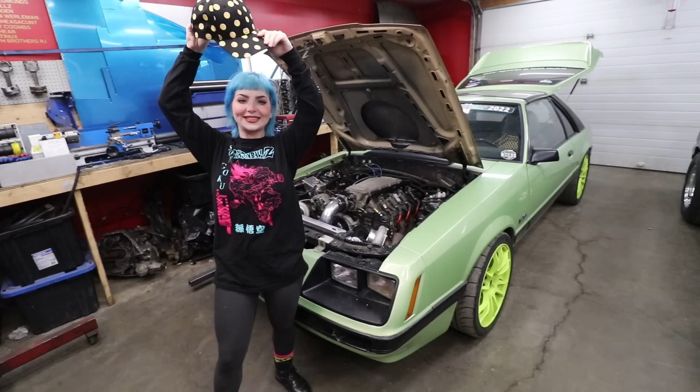It's been a while since you've seen it. Me or the car? The car. Well, that too. It's back.

It needs a few upgrades before this year's race season. Speaking of that, May 20th is the first event, which is Tuner Bash, I believe, in like 3 or 4 weeks. I'm not very good at that. Tuner Bash is the first one? Yeah. Oh, okay, nice.

So last year we had an issue with this car where we were trying to get on the two-step at 3,700 RPM. It ended up taking like 47 years. Transmission didn't like it, transmission got hot. Good thing we got the giant cooler in the front, but this year we need to solve that problem so we can increase where our two-step is so we can leave on more power.

How are we doing that? This. Dang. Dang. Circle D Specialties torque converter.

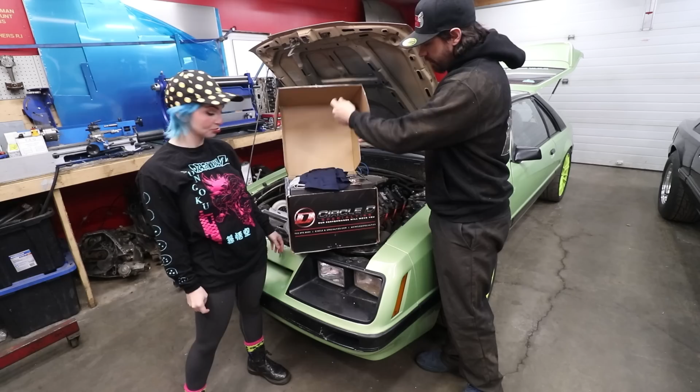Oh, swag pack. Look at that. Thanks for the shirt. Is this one for me? Yes, it is. Are they the same size? No, definitely not. That big D.

Big D energy. They even gave us the hardware with it. That's really nice. They wouldn't give you hardware with it otherwise? Like this? I don't know. I'm not even sure I've bought a brand new torque converter before.

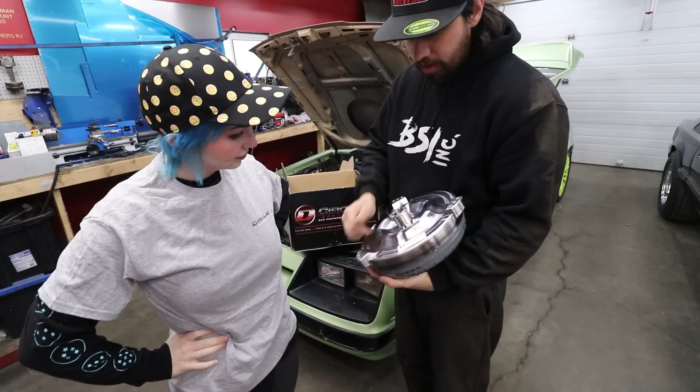Oh, you've always bought a second-hand one? Yeah. Well then, oh, that's the unit right there. This is like the first time I've seen it, but this looks like a billet backing plate on this one. And they've got holes, so depending on where you put it in the flywheel, different distances. That's really nice. Is that supposed to be a thing?

I don't know. Yeah, basically you call them up, you tell them which car you have, which power plant, how much power it makes, the camshaft in it, the rear gear, how fast you want to go, what does it do. They put all that into whatever wizardry they have, and then they build you the perfect torque converter. 9 chances out of 10, this thing's gonna work perfect. I hope so. I think I paid a lot of money for it too, so let's hope so.

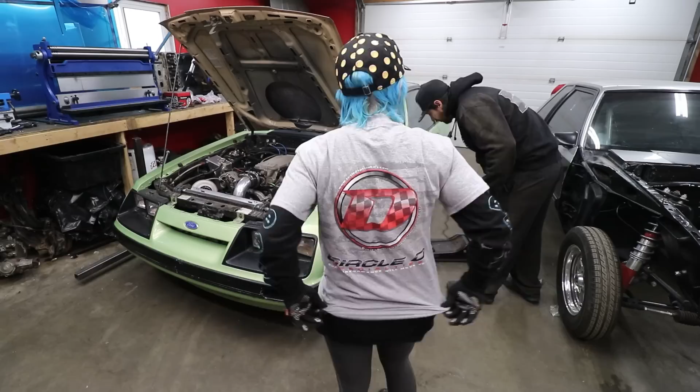First things first, we're gonna get this jacked up. There's rubber. Look at all that rubber. It's not actually that much probably, but.

I'm so excited for this race season. I was gonna say next race season, but I'm, what? You were so way tilted. Listen, I'm just tilty, okay? I'm tilty in the brain. That's how I see things. So you're excited for this race season? I am excited for this race.

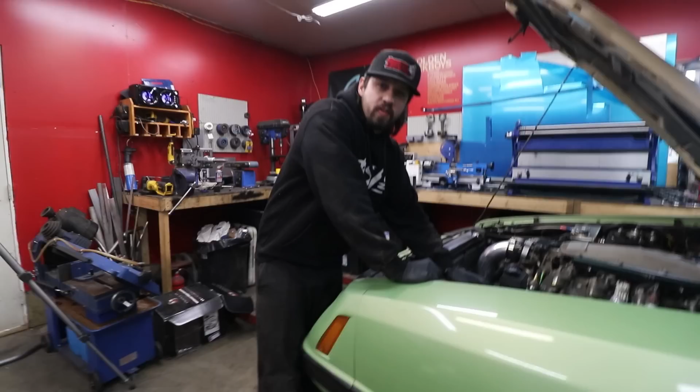Sick Summer is actually coming up in like 1 month. We're taking which cars? Your auto Mustang? Yeah, my SN95 and then this one. So we're gonna make sure everything's good. Like I kind of want to redo the exhaust on this thing and I kind of don't, but I want to redo some of the cooling to make it better, the fans to make it better. So there's definitely a dozen and one little things that I want to do to make this thing better.

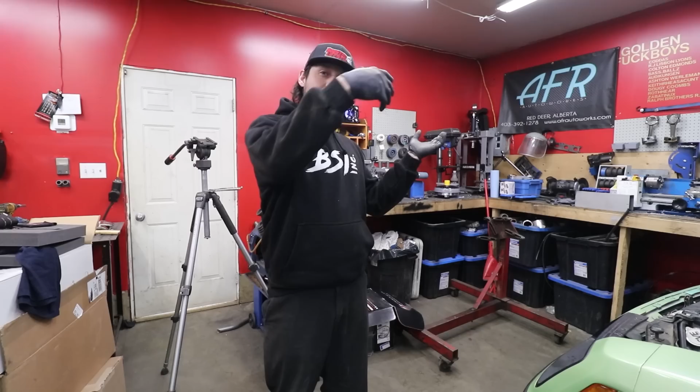And we're gonna start with the torque converter. Now that we've got it in the air, we'll start disconnecting the drive shaft, the exhaust, the transmission cooler lines, all the bolts on the transmission, and then finally get it out. So we can slide the new converter in, bolt it back up. Yay, sounds like fun. It should only take like 20 minutes.

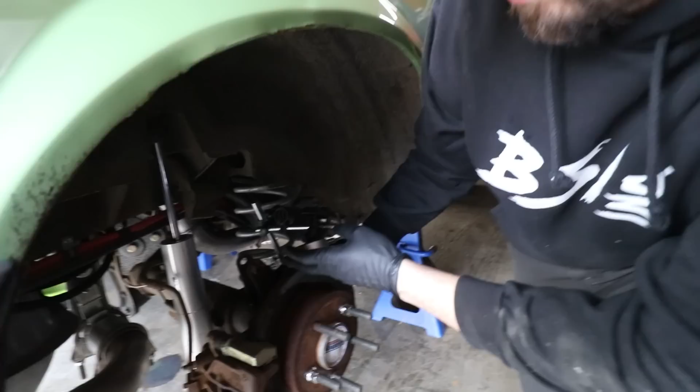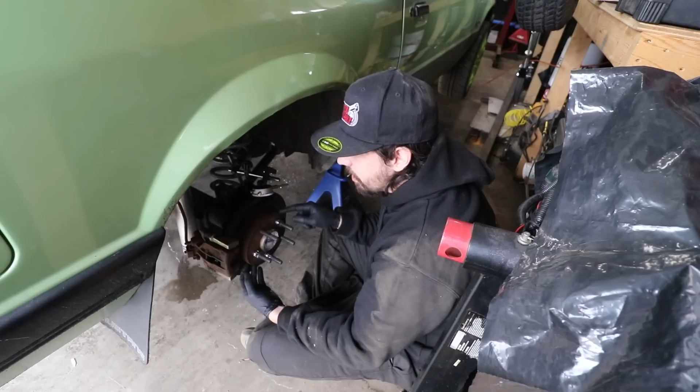There's a wheel off. Kyle's checking something with the dial indicator. Tell me what's going on there, bubby. So what I think I want to do, because we have a vibration in this car, I want to see if the runout on this axle is bent at the end, because this is the rear end that did hit the wall in my New Edge Mustang once upon a time ago, a few years ago. And I never did check the runout, and I think it might be our problem.

I'm just a little surprised that you didn't check it before putting it in my car, to be honest. You knew that when you hit the wall, it was enough to crack the body of your engine. But I hit the front, I didn't think I hit the rear. And the only thing that makes me suspect that I hit the rear is Colby, actually, like the wheel that I was borrowing that was on the SN, or the New Edge. Oh, I see what you mean. Like something else that was on the rear end was also defective that was checked after the fact. Yes.

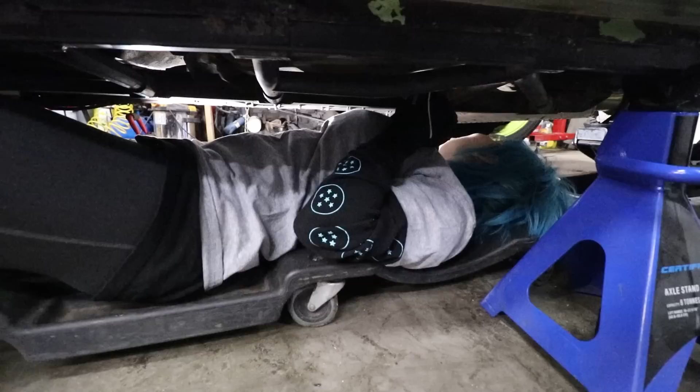Sometimes you've got to say please. Belch it out, lady. Sometimes you've got to say, hey, I'm gonna screw you softly. I'm gonna screw you gently.

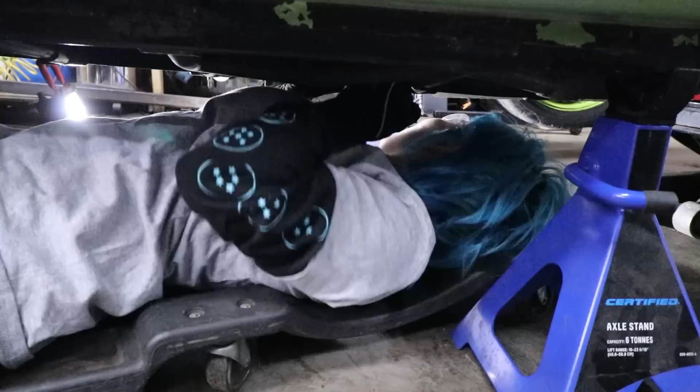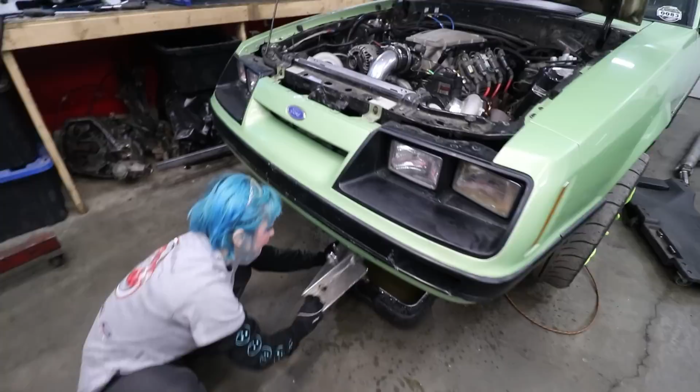Gina's pulling the drive shaft out right now. So Gina's pulling stuff from the cooling system. We're gonna redo that while we wait for another drive shaft to come in. So we're just gonna redo the cooling system. I mainly wanna get this hose right here that's on the return side to go into the side of the radiator instead of the front of it, so that we can put air filters back on the turbos, because overall it's gonna help make your engine survive longer.

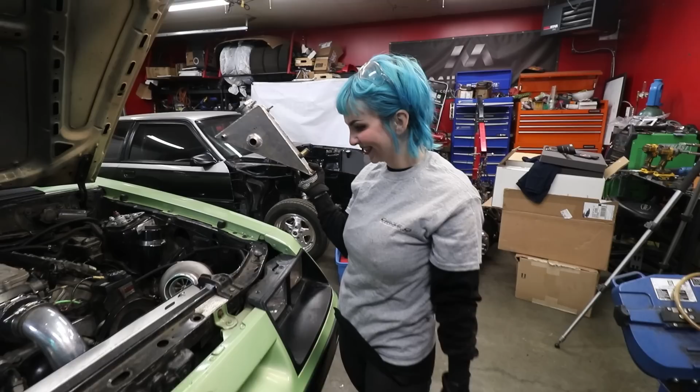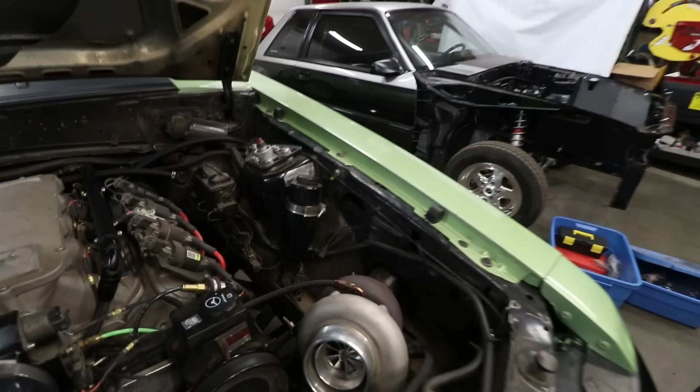Yay. So we're gonna get rid of that tank. That tank was never permanently mounted. It was just like a test tank. We're getting rid of it, or you're just... No, I'm gonna rebuild another nicer tank on the other side. Okay. So we're gonna replace that tank with something over here behind that turbo. Essentially, yeah. Well, we're gonna get rid of that one on the... This? You're getting rid of that one too?

Yep. Remember how that one would spurt, psst. Yeah, like 10 feet in the air out of that little top hole. When it was overheating, boiling over, yeah. I remember. You'd be like, watch out, watch your face. Oh my God.

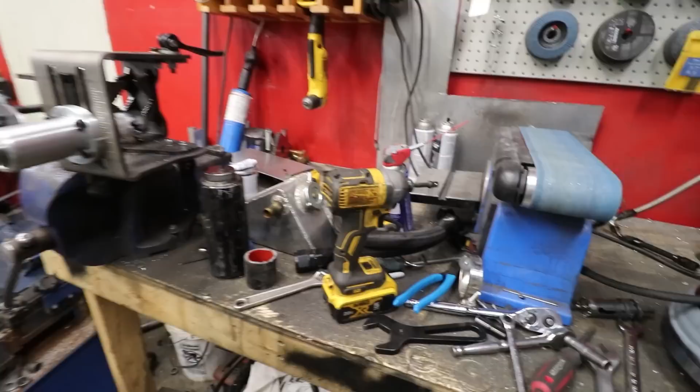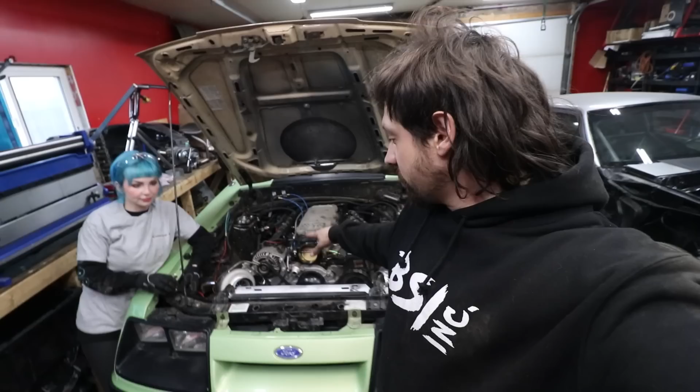Gina's got everything stripped out of this thing. It's not me. Little handy woman here. She's got all the coolant stuff ripped out of this thing. She's taking the wiring out for the fans now, because we're gonna redo that as well. We had to stage them in. So these are contour fans, and last year we had them so they both kicked on at the exact same time. And when you do that, it actually pulls the motor down. And if you're at an idle, it'll actually kill the car, make it turn off.

So we're gonna redo that so they're staged fans now, and then redo the cooling system at the same time, tuck away some wires, just make it look a lot better, because last year we really thrashed to get this thing done and Tokyo's car done, that some stuff was done half-assed. And usually you're like, oh, I'm just gonna leave it half-assed for a while, and then most times it just stays that way, but we want it better.

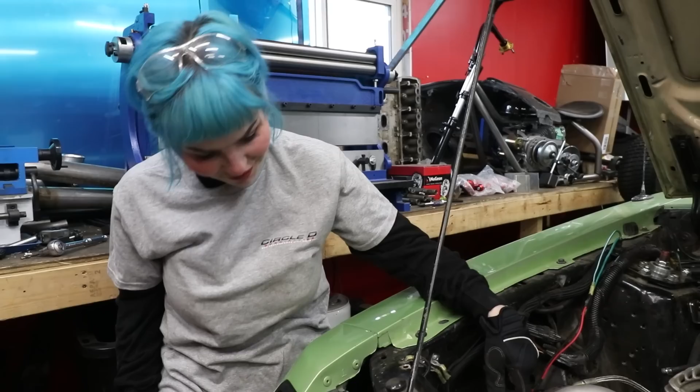Well, I'm about to lose a nut. You're about to nut? I'm about to lose a nut. I'm about to lose a nut too. You keep bending over like that. It's gone. It's okay. I've lost more than one like that. I think it went in between. I tried so hard to save it. Where did that nut go? I don't know. It's gone. It went inside, so I feel like they call that a cream pie. You cream pied it. Tell me about it.

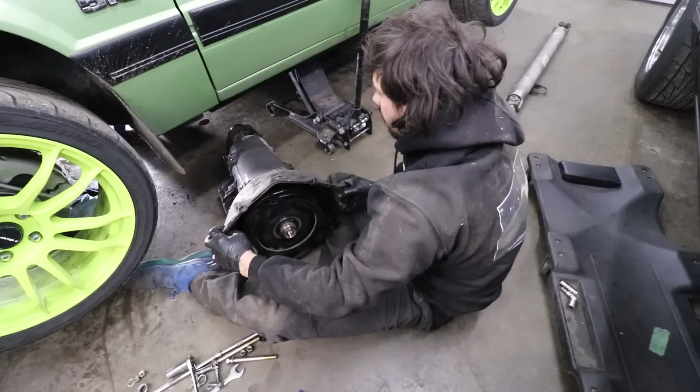Here she blows. There it is. Wow, look at it. Look at all them chickens. Look at all those chickens. This is the part that we need to replace right here.

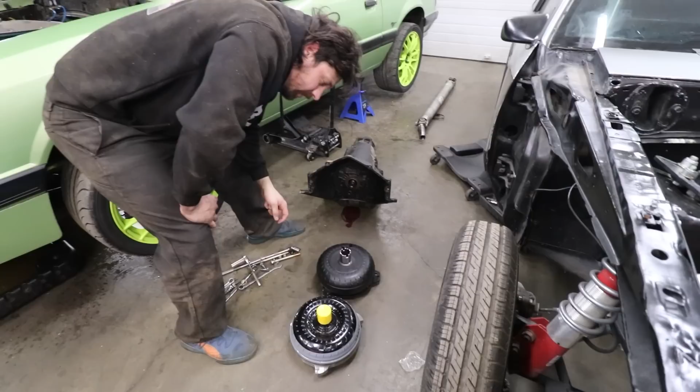So yeah, this is your Circle D converter, and this was just a Summit shelf converter for a nitrous application that, you know, some people said it might work. So we put it in there, and it didn't work that well for our combo. It's just a little bit too tight. This one's gonna go in. This one is spec'd for the car. Should be 100 times better.

I hope so. What were some things we were hoping for improvement, like putting it into first and how it slams into motion, basically? Yeah, so basically it was so tight that when you put it in first gear, it would give you slam, whiplash. And then the shift drop, when you shift at 7,000 RPM, I don't remember what it drops to, but it drops like 2,000 RPM. You want to tighten that up so it's a little bit looser, so the drop's like 1,000 RPM. Okay. Yeah, we're gonna pull this tail housing off as well to see if that's worn out or anything.

Where it connects to the drive shaft? Yeah, and then we'll clean it up, put that converter in it, get the stuff back in there. But I think we've decided that we're going to leave the drive shaft out of it, get another drive shaft made for it. And that's why we pulled all the cooling components out of it. So while we're waiting for that drive shaft, we can do all the cooling stuff in it.

We're also gonna put a set of 308 gears in it instead of 373s, which ultimately will make it slower in the quarter mile, but will give us a lot better highway cruising, which this car needs because it's already too fast for itself in the quarter mile. And then we have an anti-roll bar to go in this thing as well, which we gotta put that on. And that's gonna stop the car.

So if you watch the videos from last year, the car would do this going down the track. Yeah. What we're trying to do is eliminate that, and it'll give us a better launch and keep this car stable down the track. What does it do instead? Instead of like twisting a little bit, will it just like squat more? It'll either squat or it'll lift up on both sides.

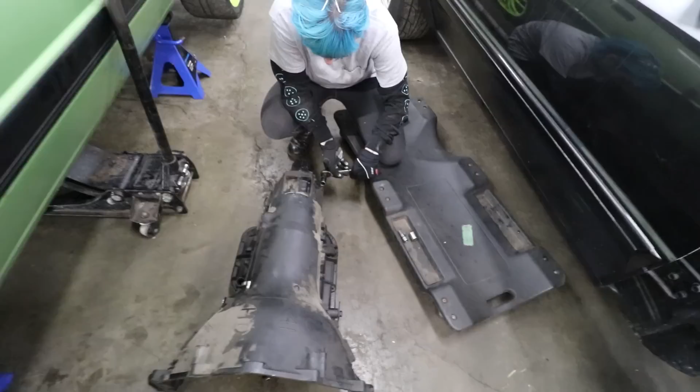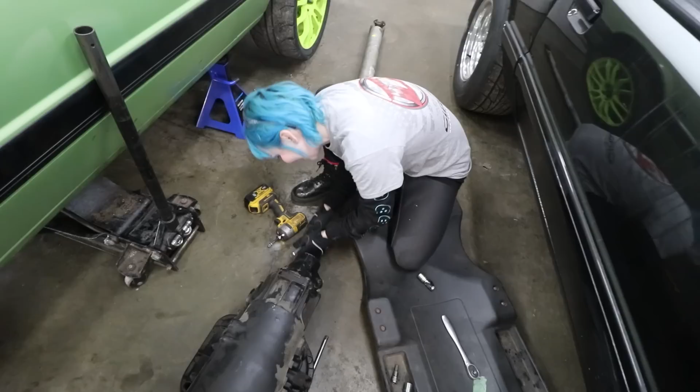Now that all the hard work is done and it's out of the car, I'll let you do some stuff now. Okay. Can I have a socket? Did you get the socket jammed in there? Yeah. I'll get it, but...

If you had to get one car right now, what would it be? Like, no restrictions, no nothing? No restrictions, no nothing. I'd get my Porsche. I'd get my Porsche GT3. That GT3 we've seen in the jelly bean color? Yeah. The jelly bean color. This one right here? What? This one right here? Oh, you're probably gonna put a clip in? Yeah. That one I really liked. It's probably not my ideal color, like if that was in yellow. So yellow. Like a smiley face yellow GT3? Oh my god. Yes, that's what I would get.

I'll take a yellow R8 as well. A yellow R8? Yeah, yellow or like a blue or something. It's got to be jelly bean color. Jelly bean color. Yeah. You don't pay like $250,000 for a car and then have it be like gray or black. People do though, and I know. I get it. Like people don't want to be flashy, but you literally just spent all that money, and it looks way better in a bright color anyways. Like a little dinky car. That's what it reminds me of. Dinky cars. Dinkies. That's what we call Hot Wheels, by the way, in Canada. Wait, other people don't call them dinkies? They probably don't call them dinkies. Really? It's weird that you don't call them dinkies.

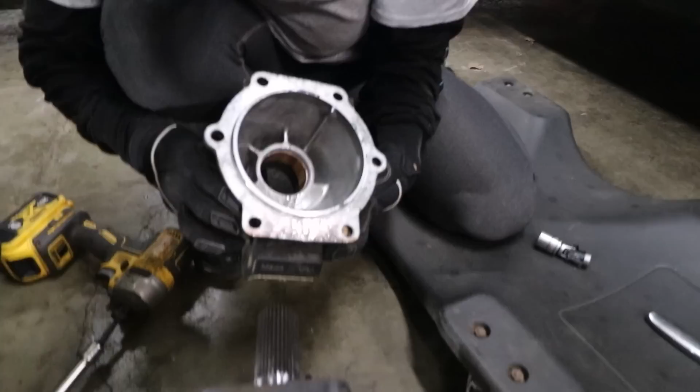So there's a bronze bushing in there that's probably forked if it was wobbly in there, definitely. Yeah. And then this, I don't know if this is supposed to wobble too, but I think it is. I think that the drive shaft and that bearing is what centers that piece. This piece. Oh? Okay.

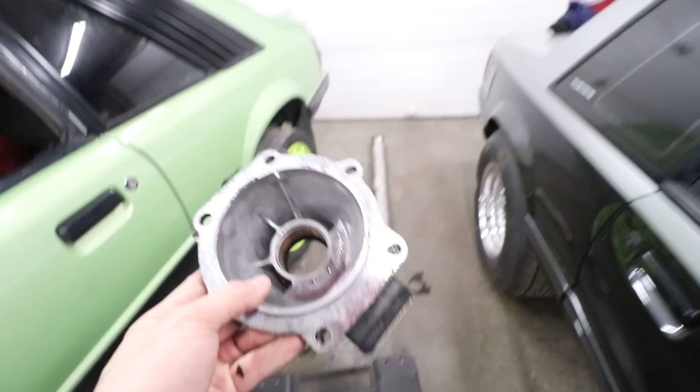All right, it's the next day. Gina's actually inside getting her stuff ready for the Calgary Comic-Con, which we're going to this weekend because she's huge into cosplay and everything. I'm going to toss this torque converter in here and get a transmission up in place just so it's not taking up spot on the floor. James said we can go ahead and throw the transmission in. We're just going to have to replace this bearing here because it did wobble a lot.

That yoke was actually the right size on the outside dimensions, but we ordered a new one that's probably this short compared to how long this one was. And then on the rear, we actually ordered the flange style yoke. So instead of a bolt-on one, it's just one that pops into the U-joints. It looks like this. I got it from Strange. So when we do the rear gears, I'm gonna put that in as well.

And then we'll have the center to center length and we'll get a custom drive shaft made for this thing. I'm also going to redesign the exhaust in this. I ordered a dual 3-inch to 3.5-inch merge. And I'll tell you why I'm gonna redo the exhaust system. We're gonna use this box for convenience right here.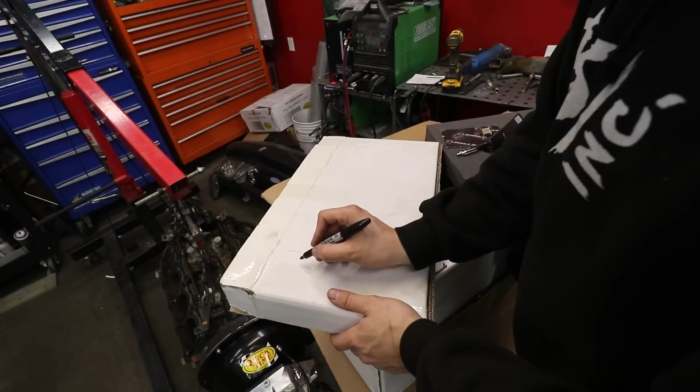So the rear axle is somewhere in this area right here on the car. And obviously the dual exhaust goes around, up and over the axle on both sides. The problem being on the passenger side, our surge tank is actually mounted back here somewhere. And the distance between this side of the exhaust and the surge tank in some spots is like quarter, maybe half an inch. And then on top of that, all our fuel lines run down this side of the chassis of the car and our power wires.

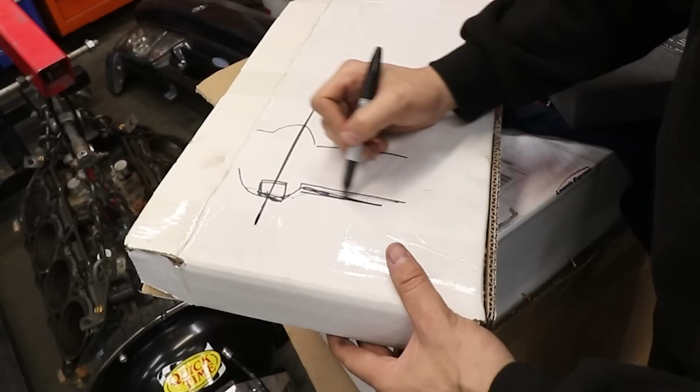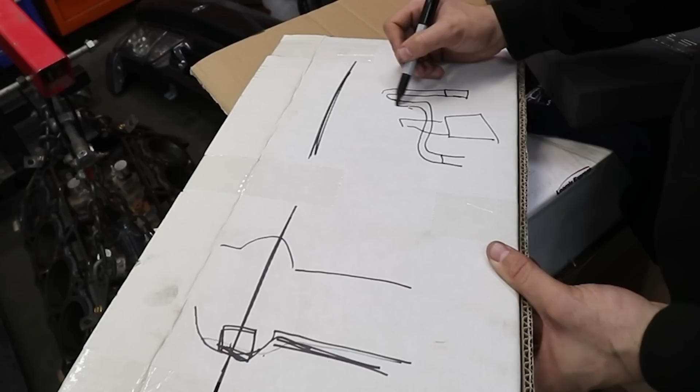So to get away from the heat, what I'd like to do is take our rear axle and I'd like to run where our 3-inch exhaust exits right here up near the front where the engine and transmission are. I'd like to take this side and run it down that side and take this one and run it down this side and then merge these two together. Put one big muffler here.

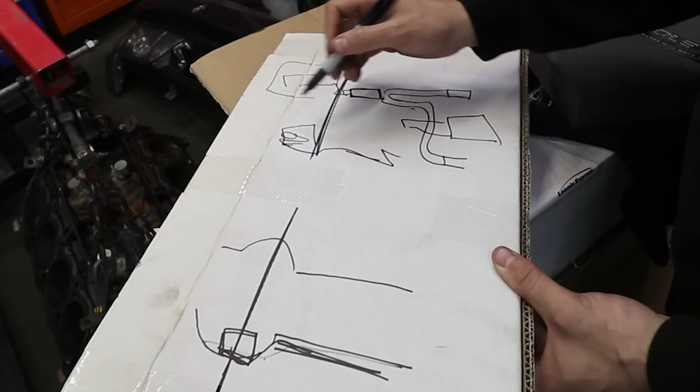So it'll be 3-inch here, 3-inch here, 3.5-inch out, up and over on this side of the car. And then it's just gonna be one tip on the outside, but it's gonna be on the driver's side. And that leaves all our fuel system over here unaffected by the heat. I don't see this car ever needing more than about 700 horsepower ever. So I think 3.5 inches is gonna do it. And like I said, I need to tuck that exhaust up, build it custom out of stainless because it's mild steel right now, and get it away from the heat.

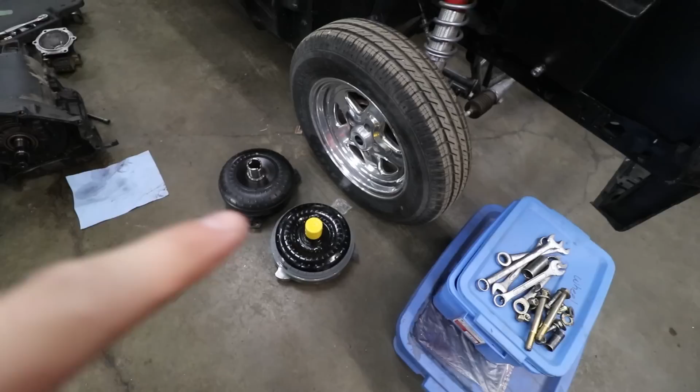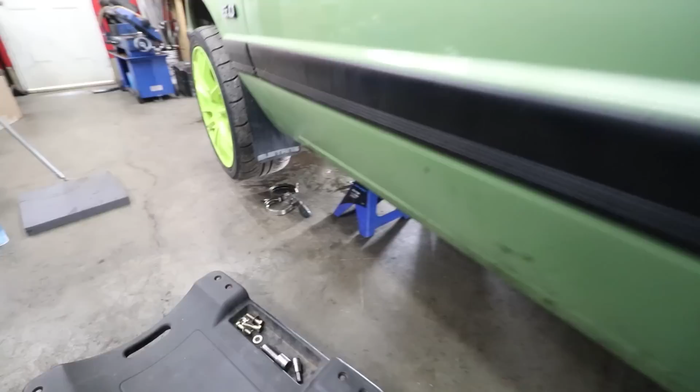Enough talking. Let's shove this converter in there. Before you shove the converter in, you're gonna wanna put a bit of oil in it. This one's already got oil in it, a lot actually. There's actually 2 splines that have to line up in the converter and this piece right here that hooks into the pump itself. So kind of just put it in there and start spinning and moving. And honestly, I think that was it. Usually it's much harder than that, oddly enough. Also gonna spray down this junk a little bit. Stupid thing, back up in place.

Now we're kind of waiting for parts there. What I'm gonna do is I'm gonna pull the 2 rear tires off, get all that exhaust junk out from back there, and then possibly start putting the sway bar in because it really needs the rear sway bar. I'm trying to get a good spot for this.

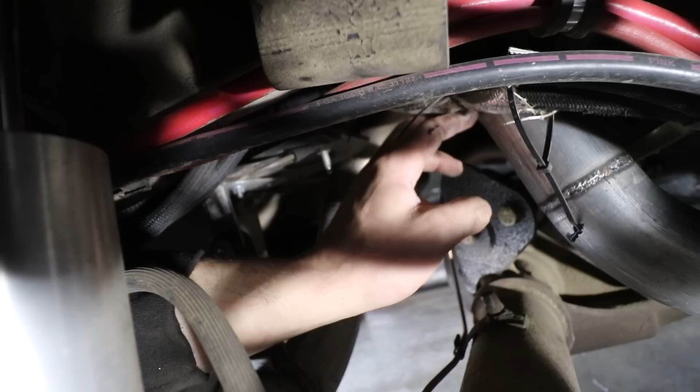You can see right there, that's our surge tank right here. This is the exhaust. When it's actually bolted up, it hangs like here, but that's how close it is to that. Here's all our wiring and stuff that runs along the frame rails. There's some fuel lines and stuff, so it'd be nice to get rid of this pipe and put it on the other side. So we're gonna get this out of there. It's kind of disappointing to destruct something you put some time into, but half-ass means twice as much work when you go full-ass the next time.

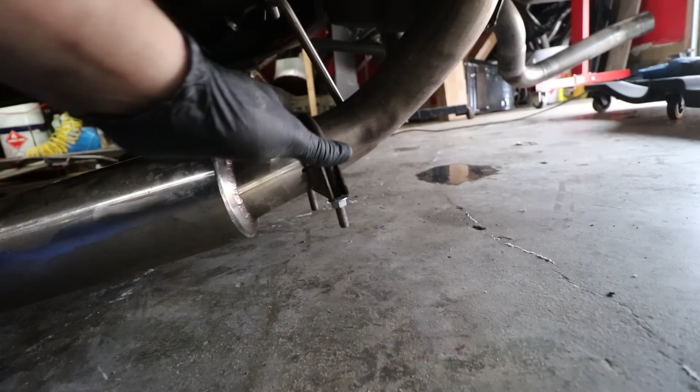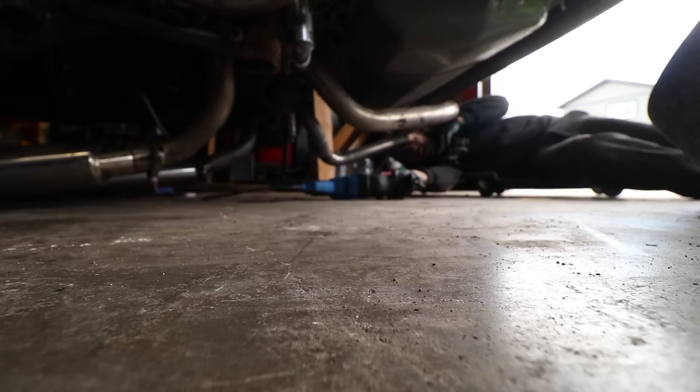This is another reason I hate exhaust kits. Anytime you put one of these style clamps on something, you basically just squish the 2 pipes together and then it still leaks and then it never comes apart. So now I've got to sawzall it apart and basically ruin this exhaust that I was never gonna use again anyways, but sure. With enough hammer beating, I'm sure I could get it off. We're not gonna play that game. I have no use for mild steel pipe, so. And just like that, junk.

I bet you Peg would love that though. He'd be like all over that.

Smile. Yeah, we're going to look at rental apartments. Investing. Trying to, anyways. There's nothing crazy about them, but they're spacious. They have obviously your own laundry unit, 2 bedrooms. Sorry I didn't leave you with any context there. We're looking at our first rental property. We've been looking at investing since we had more money coming in. It's just the first step to accumulating more money, I guess.

It's really funny though, because my favorite part in any video game is accumulating wealth. Whatever game it is, build your character, accumulate wealth. I don't know why, that's just what I was addicted to when I was younger. I used to play Old School RuneScape all the time. My favorite thing was just to build wealth. Didn't even care about killing any bosses or doing quests or whatever. I just wanted to be rich.

And I don't know, I've never taken it into the real world. But it should be easy considering all the information you have online nowadays, and everyone's done it before and they're willing to help out. Makes sense. So, we're gonna be the weirdest millionaires in the world.

But it's okay. Man, look at all that wiring. Jesus, goddamn Canadian wiring is wrecking my freaking sperm count! And here's Geena's sway bar. This thing kind of just fits in the back of the car there. This goes on the frame rail, you weld that in. It's a welding unit, and then you gotta weld in little pieces on the axle.

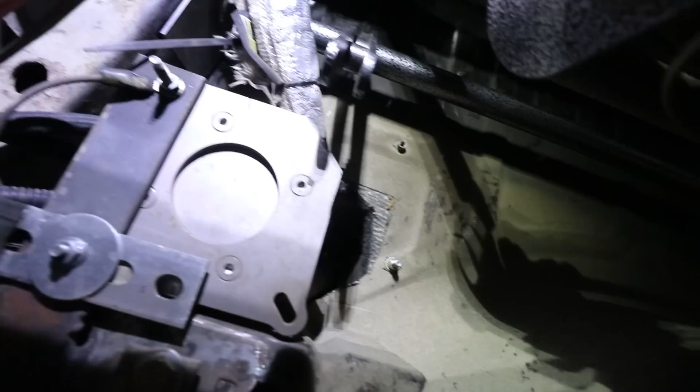What happens is when the axle goes up, normally it can go up like this, or like this with no sway bar. But when you put the sway bar in there, when this side goes up on the axle, this side wants to go up, and it pushes this side up at the same time, so everything goes up evenly. I didn't even consider the surge tank being in the way of the sway bar, but it is. So when this goes up, it's going to hit the surge tank.

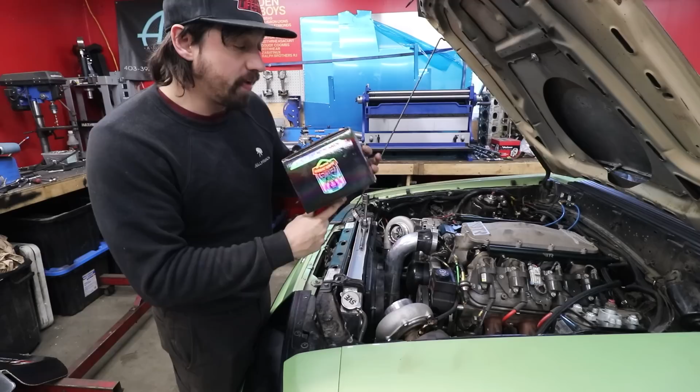This surge tank has been proving to be such a pain in the ass ever since I installed it. I'm not dealing with that right now because I have to move the surge tank and I have to do this and that. What I'm gonna do is something where I don't have to get dirty. We're gonna mount our Black Sheep Industries 50mm blow-off valve, which I should have mounted last year, considering I'm part owner of the company.

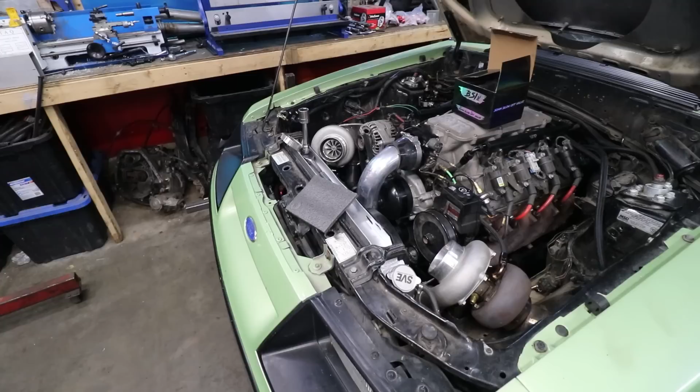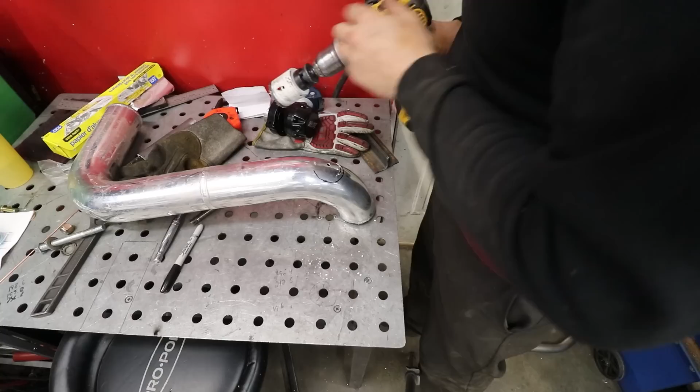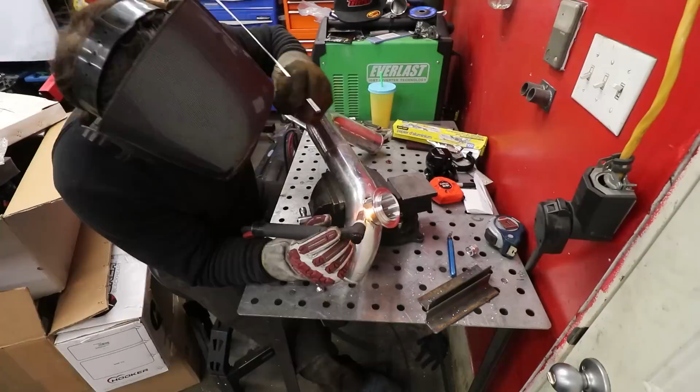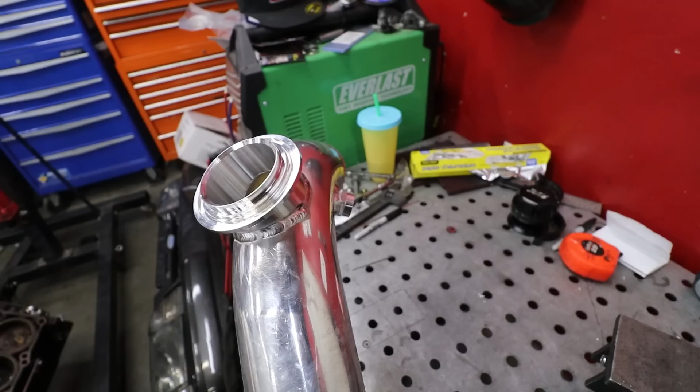And we're just gonna see where we can fit this essentially. No Play-Doh, but we got tin foil. Ooh, not much clearance there. It's basically gonna have to go exactly like that. If there's one skill you should learn to make this car hobby cheaper, it's welding. One Black Sheep Industries flange welded on there, nice and thick and juicy.

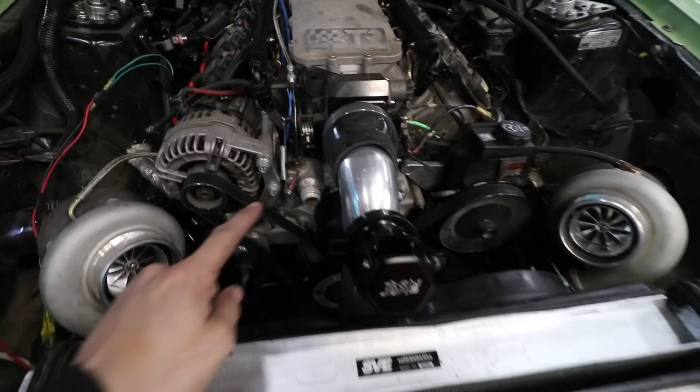And then we also added an intake air temp sensor because we didn't have one of those before. Oh man, does that ever look mint. What we really need to do now is get the coolant so it goes underneath, so we can put a little bend here with an air filter, a little bend here with an air filter, just so it all mirrors up after. We should get this powder coated, that powder coated, a black alternator, that one powder coated too, maybe the valve covers, and then it'll look sick, I think. Can't wait for it to go.

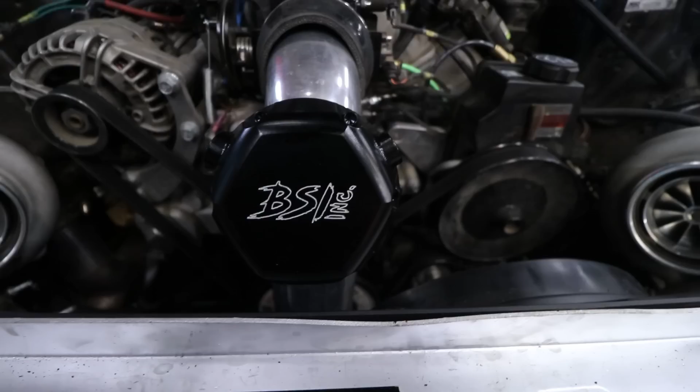And there's our bung. So I kind of tucked it back there so the sensor's gonna fit out here, and then the wiring just goes back. The reason we didn't put it on is because I had to extend the wiring. It's all the way back here somewhere. That's it for this one.